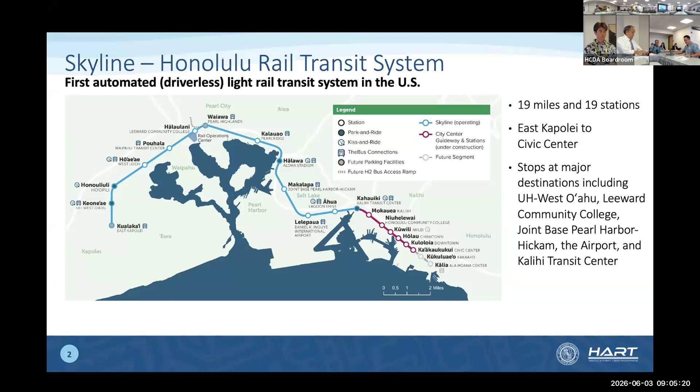For future planning, recently City Council approved or put forth Bill 60, authorizing HART to plan, design, and construct beyond the current full funding grant agreement for the project as described in the previous slide. That authorizes HART to do so, but it doesn't provide funding, unfortunately.

Currently, we are in discussions with stakeholders on funding and opportunities to begin the planning, design, and construction of the extensions. Obviously, we need to get to Ala Moana, which is part of the original scope, but also further west and further east towards UH Manoa, if possible.

Just want to highlight here, in the current city center guideway and stations contract—the last contract for the 3 miles and 6 stations—there are options within the contract to allow the contractor to design all the way to Ala Moana, guideway and stations. We also have an option in that contract for them to do the construction, although unfortunately we don't have the funding, so we can't do so.

We did exercise the first option for design, but we did not release full notice to proceed to expend on that. We did release a limited notice to proceed for some conceptual planning design for that extension to Ala Moana. We have some funds at the end of the project, very little funds that only get us a portion of the design. So we're working with the contractor on that. They're also doing some geotech boring just to help with preliminary design aspects needed. Until we get additional funding, we can't really extend or exercise the full option or full notice to proceed on those options.

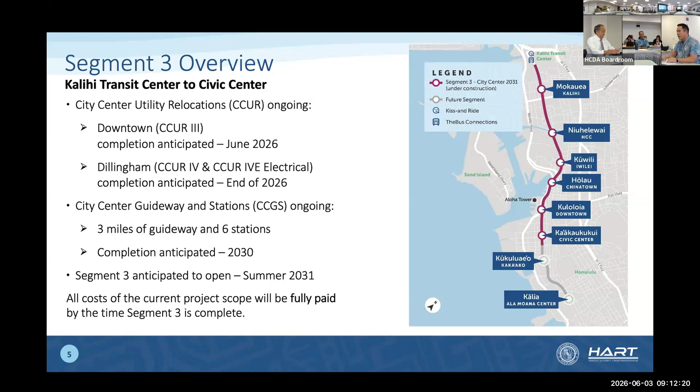Just wanted to give you some visuals of some of the utility work that's ongoing. The photo on the left is a micro tunnel, a 4-foot tunnel that goes under the Kapalama Canal. From Kohou to Kokea, they're about 30 feet down. A tunnel that goes right under the canal to carry these conduits for HECO lines, some communication lines, all under the canal, part of the utility relocation from taking overhead to underground.

That center picture there is some of the 138 kV utility poles that were installed. And then on the right there, some of the flat works, paving, intersections, restoring some of the curbs, sidewalks, ramps, and things like that at the intersection.

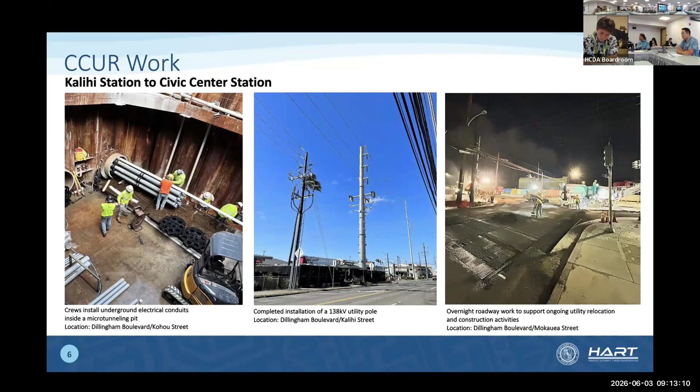CCGS, City Center Guideway and Station progress. Currently, we have 24 guideway column shafts completed to date. The first guideway column was completed in March. We did a press release there. Since then, we have 4 total columns completed.

If you drive along Nimitz, you can see some there. At the Iwilei substation area, there's an additional column there. I mentioned some of this in terms of the traffic control plans or maintenance of traffic that you see on Nimitz, and then also on Dillingham that's soon to change with the transition there.

The Chinatown station construction started. They're wrapping up some of the piles or the foundation supports for the station itself. The contractor is moving to Kapalama Station here shortly. They're right now mobilizing and will begin that foundation pile work there.

Halekauwila, we recently got our supplemental archaeological inventory survey completed and approved by SHPD and the Oahu Burial Council. So that opens up that area to begin work. Right now, we're starting some potholing, some investigative work for where the columns are going to be located. So our contractors there currently working day and nights, mostly at night currently, to do their investigation.

Then we'll have some minor utility relocation, some unforeseen items, such as the water line, irrigation lines that need to be completed. And then the CCGS contractor will move in there shortly thereafter, we'll provide some further details as to what we expect.

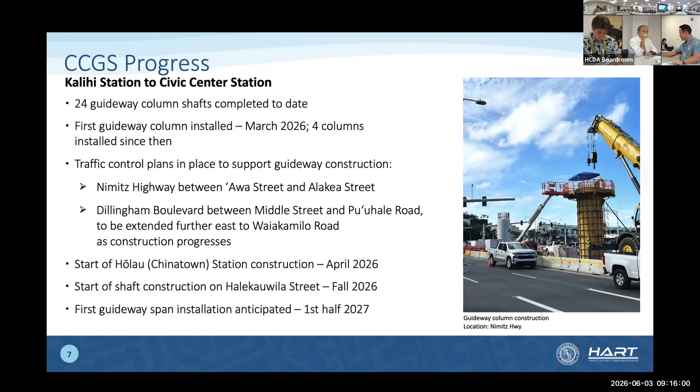There's some photos I talked about. On the left, there is activities for drilling the shafts that support the columns that will then support the guideway. These shafts vary from 75 feet to 250 feet, depending on location and the area. They're about 8 to 10 feet in diameter, so very large shafts. That cylindrical, steel casing that you see there is what goes down into the shaft as they dig the shaft. It supports the earth around it, and they put in the steel cage shown there on the right. So they drop that steel cage in there, and then they pour concrete, which then becomes a shaft that supports the column.

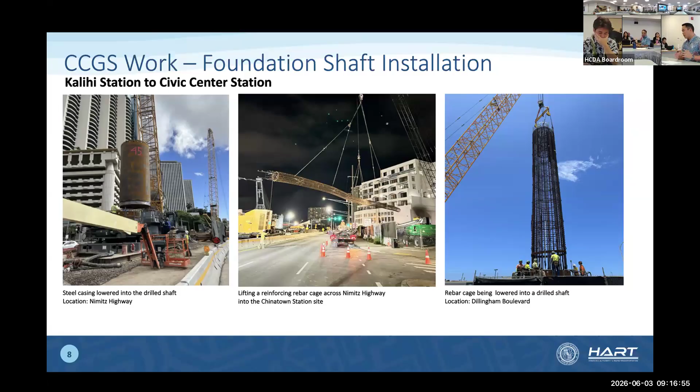The picture there in the center is some of the rebar cages for the station support piles. So this is within the Chinatown station there. A little smaller than what's in the guideway. There's more of those that support the station.

So going on to some of the station renderings, just want to note that these are preliminary. Right now the contractor is about 75 to 90%, depending on the station, so some of these may change slightly. But just to give you an idea of the station designs and where we're at, the first one on the left is the Kalihi station.

Some things to note here that look very different from segment 1 and 2. The canopies on the platform, rather than that tensile fabric stressed canopies, we have more of a traditional roofing metal type covering for the platforms. Same percentage of covering that we have in segment 2, but different material. What we've noticed with the tensile fabric canopies is that they're very difficult to maintain, requiring special equipment and special rigging for employees to go up there and maintain.

So in discussion with DTS, we moved away from those canopies and went with more traditional roofing. The other thing to note is the guideway structure - you can see where the columns are, that hammerhead or T kind of structure that supports the guideway. In segment 1 and segment 2 we have a segmental box girder type guideway where there's a cavity in the middle. Moving forward for this segment, we have more of an I-beam girder, very similar to bridge construction. If you're driving under the Nimitz Viaduct, you can see above you those I-beam girders - very traditional bridge looking structure, very different from what is in segment 1 and segment 2, which most people will quickly identify.

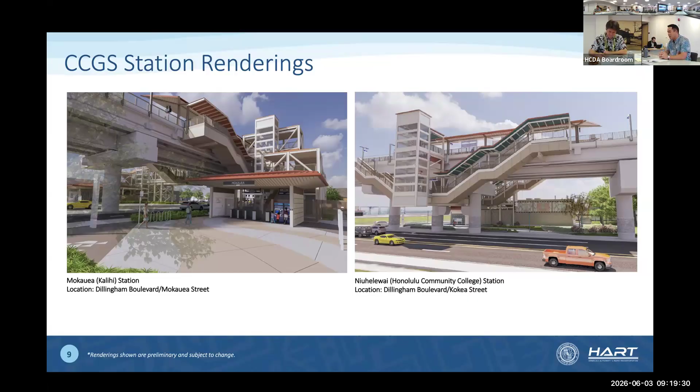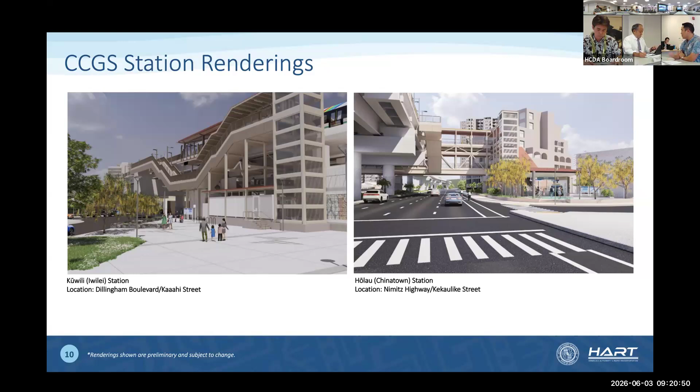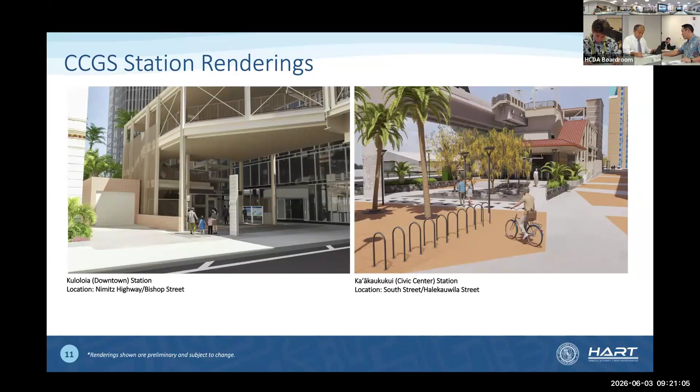Then we have the downtown station shown there, at the corner of Bishop and Nimitz Highway, and then the Civic Center station. I'll quickly go through this slide because I have further detailed slides on these two stations. For the downtown station, the Mauka landing is located between the Dillingham Transportation Building and the Pacific Guardian Center, and the Makai side is located right at the corner of that HECO property, Bishop Street and Nimitz Highway.

Right now we are looking at prepping that site. The Makai side has already been prepped. The Mauka side, we're planning and mobilizing to start next month to get that station ready to start construction. The guideway shafts are expected to start in August of this year and finish in October, right when they plan to start some of the station foundations. So very shortly you'll see some activity there. Once those guideway shafts start, they'll move in an east direction towards Halekauwila Street, and that's when you'll see a lot of the half block closures in that area, moving from west to east along Halekauwila.

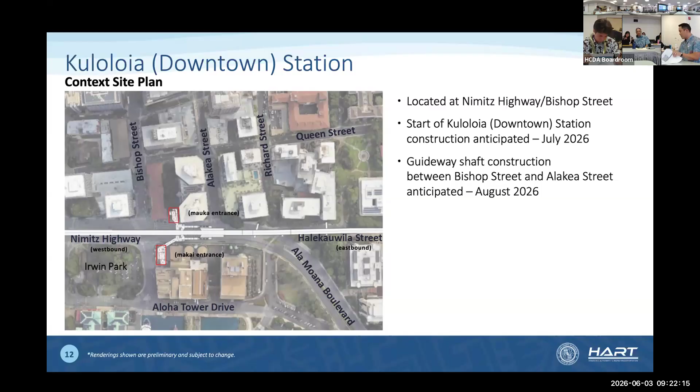So here's kind of a bird's eye view of the station and renderings. You can see the Mauka entrance and the Makai entrance - the station or platform itself is right above Nimitz Highway. So you would enter either the Mauka or Makai part of the station, go up to the middle where, just under the guideway, is where you would pay your fares or buy your tickets, and then head up to the platform, either going left or right depending on which direction you're planning to go.

You can kind of see there the change in the roofing, although it's hard to see, but you don't see the traditional canopies that we've seen on segment 1 and segment 2. Of course, all the stations have ADA access, with elevators to and from, whether it's the ground level to the station platform, meeting all the ADA requirements.

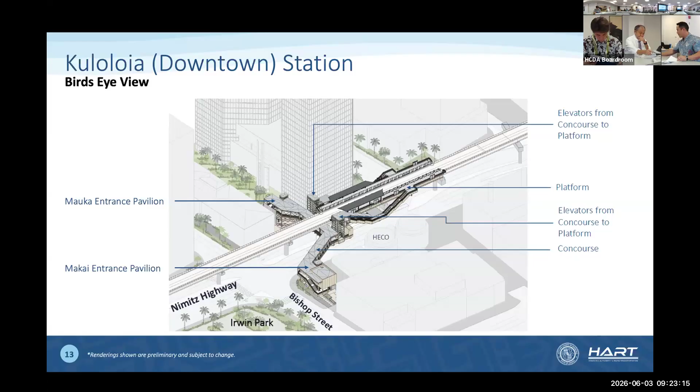Just wanted to highlight some details in the station in terms of some of the mitigations related to the cultural history of the area. With this station, some of the paving takes into account the cultural history. We've done extensive research into the area, the surroundings, what was there previously, the history of the area, and incorporated that into the design.

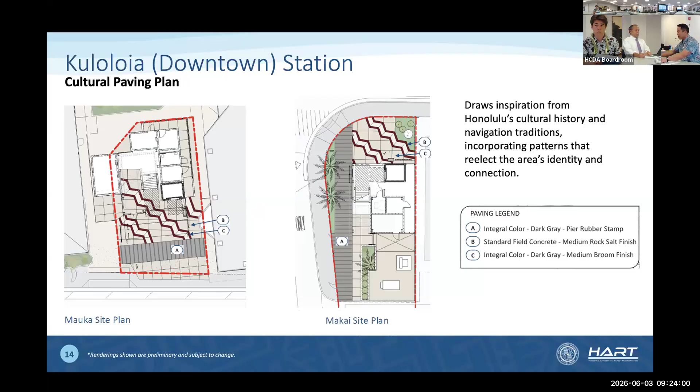Civic Center Station is located between South Street and Keawe Street, formerly the Servco property, and then next to Keauhou. On the Mauka side of the station, the Makai side, the entrance will only be at the Makai side.

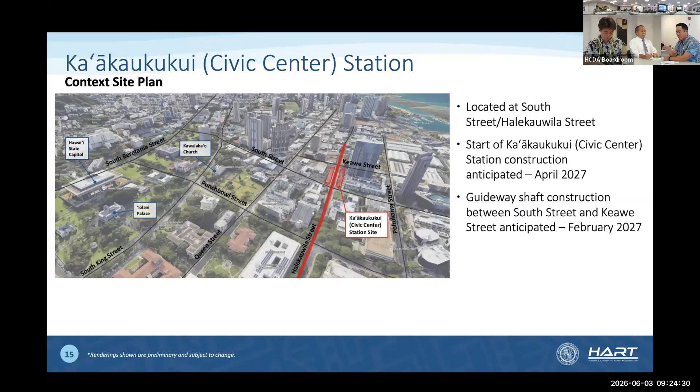So you would enter on the Makai side, head up to the concourse level, and cross over to the other side if you want to go in the other direction. But there is no entrance on the Mauka side, the Servco side.

You can see there is potential for expandability on the Mauka side of the station. The elevator shaft does go from the platform level all the way to the ground level, although the elevator will only be programmed to go from concourse to platform.

On the Makai side, the entrance there, you can see at the bottom, that's where you would enter the station, pay your fares, and then walk up to either the concourse or up to the platform level. And like the other stations, it will be ADA compliant, with elevators to the ground floor all the way up to the platform.

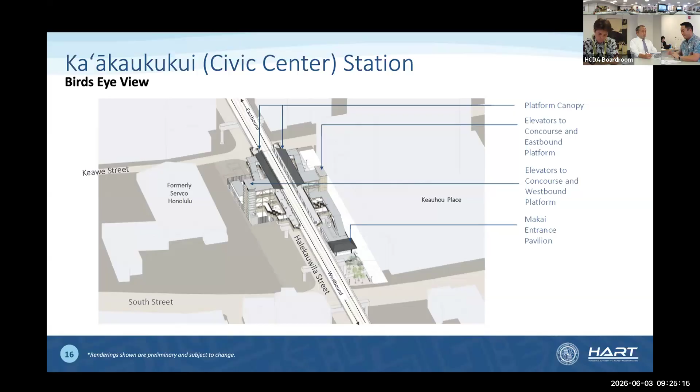Sure. Thank you. Yes, please.

While you're on the Civic Center station site, I heard that for the guideway supports coming down Halekauwila, it was going to straddle on both sides, but I also heard they might be shifting the design to a single support. Is that true? No, you're right, and thanks for pointing that out.

All the supports on Halekauwila, maybe with the exception of the far west end and the far east end, will be straddle bents. That was some of the optimization we did previously during the design phase, right before or during the utility relocation, because there's a large HECO infrastructure in the center of Halekauwila. To avoid that, we went with the straddle bents. At every station you'll see that straddle bent, columns on two sides of the street, to support the station structure itself.

One more question, Chair. For the Servco site, what are your immediate plans and next steps?

Once we get access to that site, the first thing we'll do is demolition of the building on the Halekauwila side. That building impacts the construction and the overall structure of the station. So we'll demo the building, and then the contractor will move in, most likely using the area for storage and laydown before they start constructing the station there.

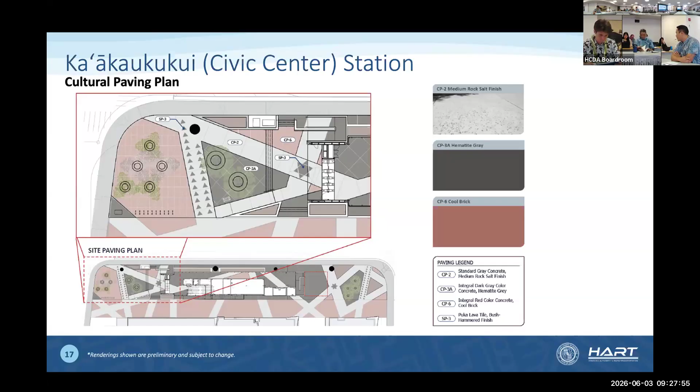We've done a number of neighborhood design workshops, and hopefully people here and others had an opportunity to come and participate. We did 2 workshops per station, and we've completed 5 of the 6 stations. The first workshop presented very preliminary 30% designs, looking for community input on the touch and feel of the station, whether it's color, landscaping, or some of the architectural features. After the initial workshop, we provided options for the community to vote on, and we had really good turnout with the community coming out and providing input. We took all of their comments and voting and implemented them into the stations. You can see some of that implemented there.

In Chinatown, we have a few more mitigations or implementations from that neighborhood design workshop. The last design workshop we have is for the downtown station, which will be held on June 10th, I believe at the Aloha Tower. If you are not subscribed to our email, please do so at honolulutransit.org.

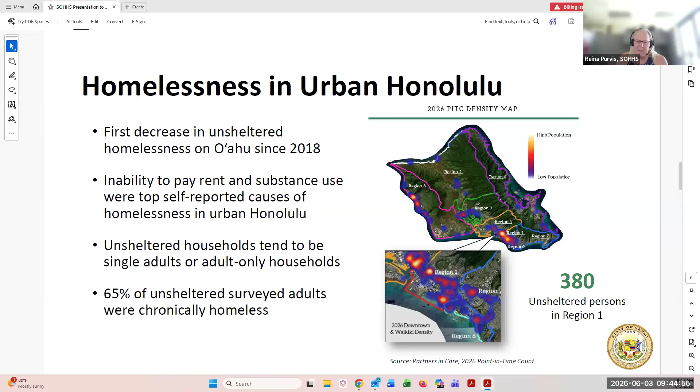And now, the reason I asked the question that I did earlier - we are in a lease with the 550 Halekauwila building. I did not realize it was the Tani building. We refer to it as the lawyer's building, and we're very much concerned as to what the development across or along Halekauwila might mean for this.

So we are hoping, intending to look at a residential renovation that provides residential rooms, community spaces for a kauhale in that building. You can see it's an adaptive reuse of the existing building, with shared cooking and sanitary facilities.

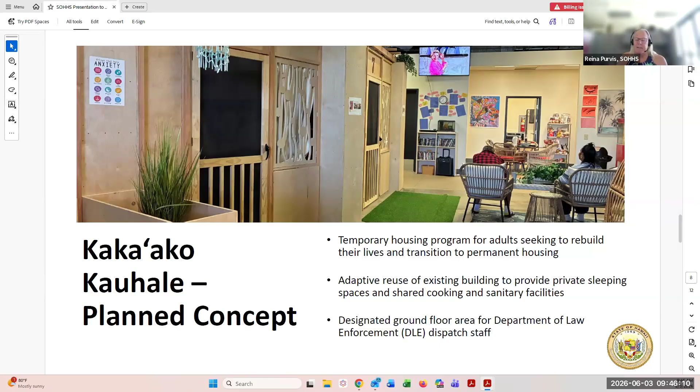Right now, we are working on a partnership with the Department of Law Enforcement to have a dispatch station there, which we believe would certainly provide added layers of safety and security for the building and for the residents.

So we're looking at up to 45 adults. We would have a program service delivery operator staffing. They would be providing the support services, as I've mentioned in other sites, and would be there 24/7 to manage the residents and the operations for that.

We do have in all of our kauhale varying sets of values. Some of our kauhale are low barrier, and some are high barrier in terms of who is able to join. This one is intended to be a kind of a mid-range.

They have to be willing to participate in the support services. This is not a place where someone can just come in and be there and do anything they want. It's also a dry facility, so no drug or alcohol use on site - that could result in being asked to leave the kauhale.

You see also the loitering, panhandling, the disturbances - we're hoping to mitigate that significantly given the area and the community that we would be working with, and all of the businesses in that area as well as other residents. So the goal is that they're able to live in community and then build the capacity to live on their own eventually.